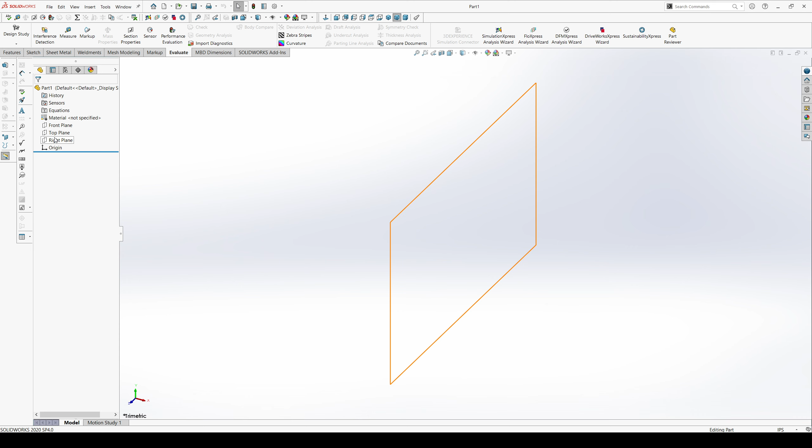So you get to Solidworks and you will select your front plane, go to an extruded boss base feature, and now you're in sketch mode. You need your planes turned on so that you can see your axis.

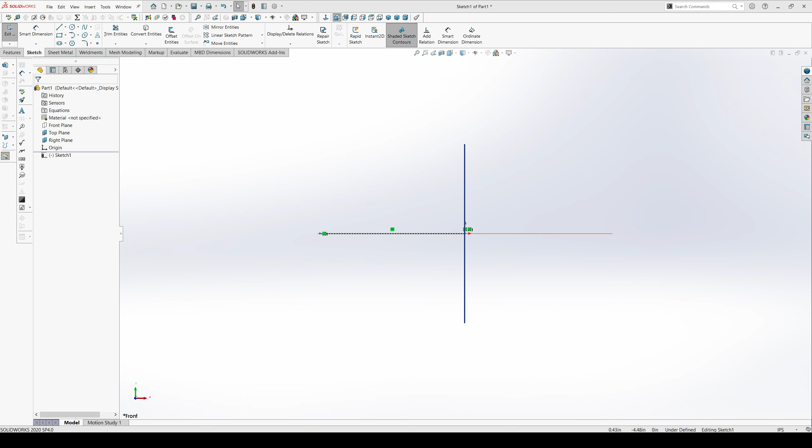And then let's start sketching. So we've got ourselves a line going from this axis here over, and then up and over, up, over, up, there's a little bit of a thing there, there's a little bit of a deal there, and then like that. That's sort of how it is.

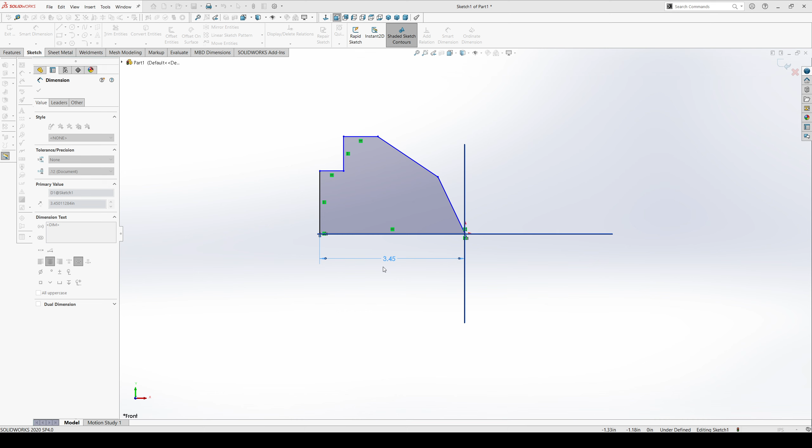And then you start putting dimensions. So you go up to Smart Dimension, and you'll select that one. And this one should be 3.62. And then the height should be 2.

And then you've got the height of the step is half, so go from here to here. That's 0.5. Then the width of the whole landing here, so you go from the point to the point, and that should have been 1.53, so we are pretty close.

And then the width of the step is 0.75, so you go from that face to that face, and you tell it 0.75. That moves everything over.

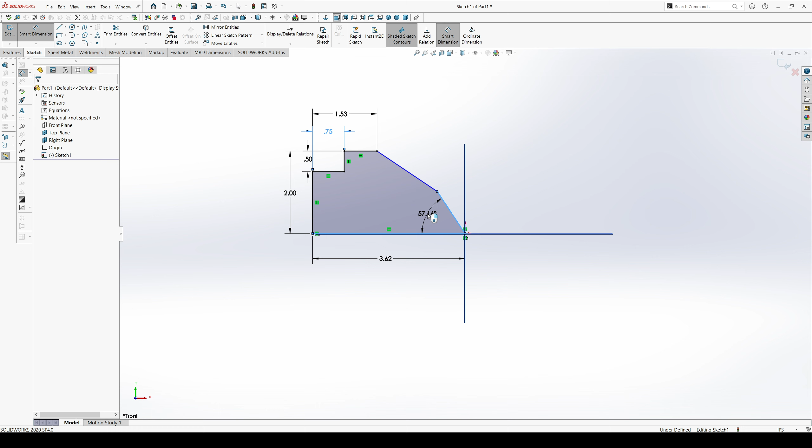And then you've got 2 angles that you gotta do. There's a 60 degree for here, 60 degrees, and there's this one. If you go on this side, you'll do the inside angle. If you go over here, you'll do the outside angle.

You just want this little angle over here, so you have to go below the line. If you imagine this has an imaginary line, you have to go below that. That's how you'll get this. That should be 30 degrees.

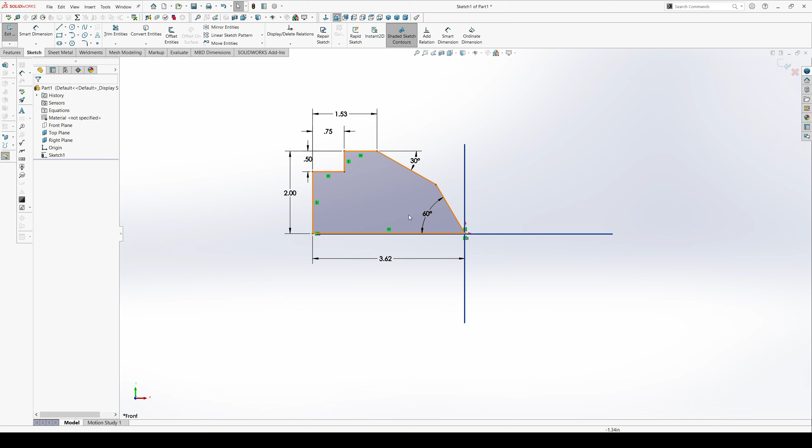We'll confirm that everything is right. Okay, and so that's how that's done. Your lines should all turn black. It may or may not fill in this color. That's kind of an option in the settings. But that's your first step.

Then you go over here in the top right. You'll have, if you hit the X, all this goes away. You want to hit the check, and you get into your extrusion mode.

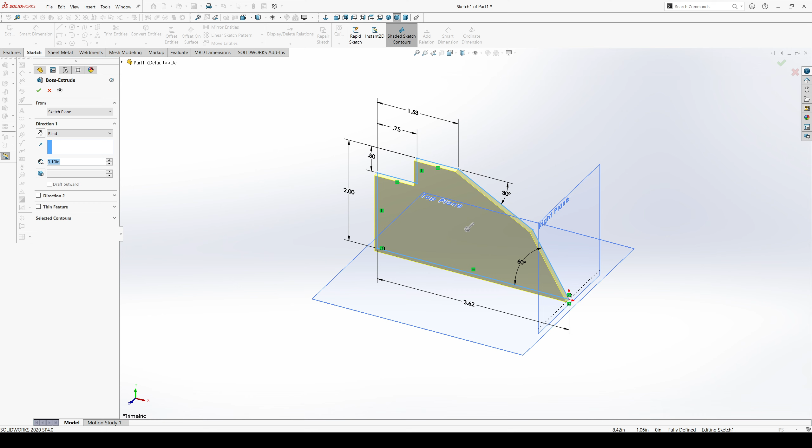And since our part is 1.5 inches wide, we'll do 1.5. But instead of doing blind, I'm going to do mid-plane, and that'll just center it along on this plane right here. And then you'll hit OK. And then now you've got a part.

And so at this point, I'd go ahead and save this. It's called PI02 for Ahmed. You can see I made it yesterday so that I know what to do.

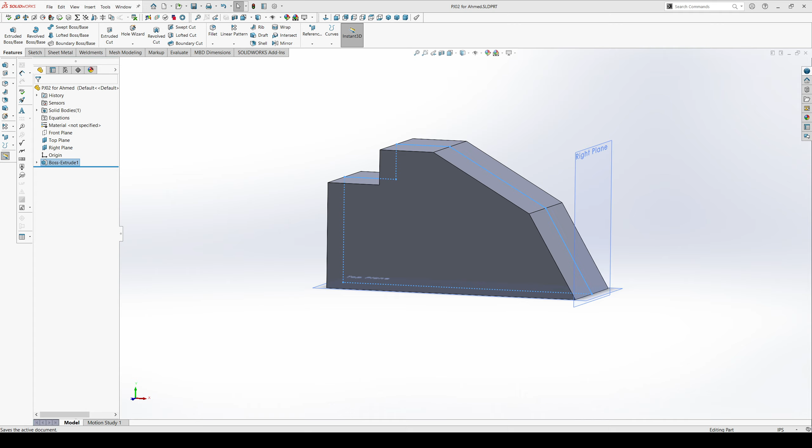Okay, so now you've got the general shape that you need, but here you need to have there's a giant cut in the part. So if you click on that button and you tell it a top-down view, so like that,

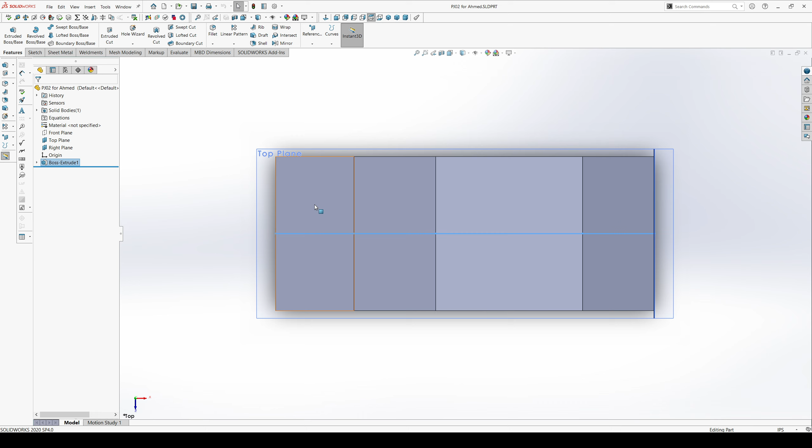And I like to have the dotted lines. I mean, you can leave it in that mode. You really can't tell what's going on. It'll all make sense in a moment.

So what you need to do is an extruded cut, and you're working off the topmost face, because you're trying to cut from this surface down. If you do it from here, the cut will start from here, but it'll miss all of this stuff up here. So you want to start from that face right there

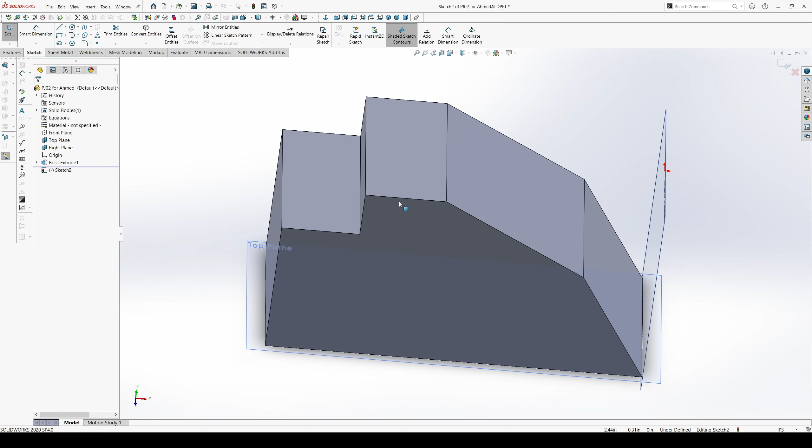and look back down on it. And then now we're in sketch mode. So there's some trickery here that I'm going to do.

We'll just do a line like that, and then like that, and then that closes that in.

Now you want dimensions, so you go from here to the outside. You want that to be 0.25. And then from here to the outside, also 0.25. And here to the outside is 0.25.

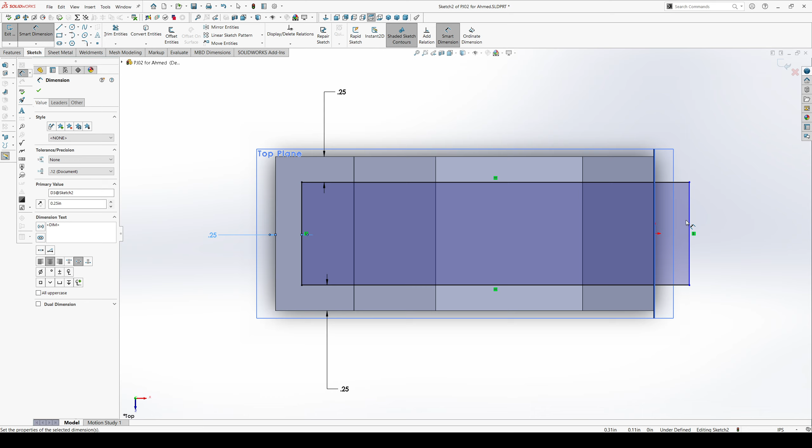And this side, I mean, you could make it up to the surface plane, but because you're doing a cut, it doesn't really matter how far out that one is.

Okay, so now you've got your sketch of how it's going to cut. We'll get out of this, hit the check right over here, and you'll see it's starting to take a cut. When it turns yellow like that, that's your cut.

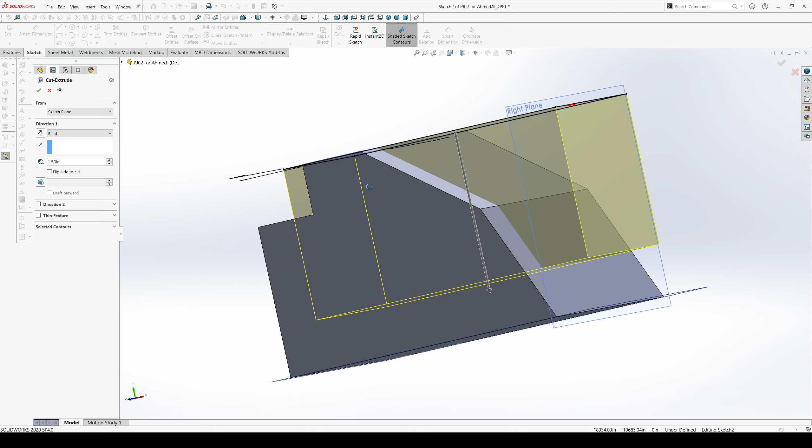So the height of all of this was 2 inches, but we need to leave a 1/4 inch at the bottom. So we'll make that 1.75, and that should leave us with 0.25 here at the bottom. And you'll just hit yes.

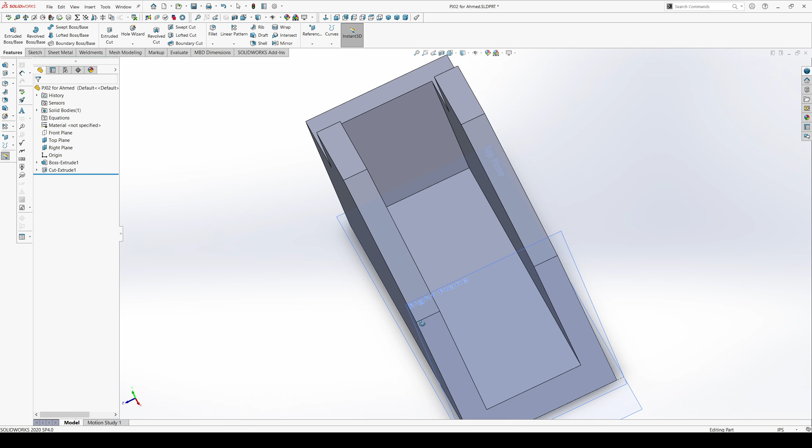And you've got the part with the cut. You can turn off your planes if you'd like at this point, you don't really need them. So there's your part.

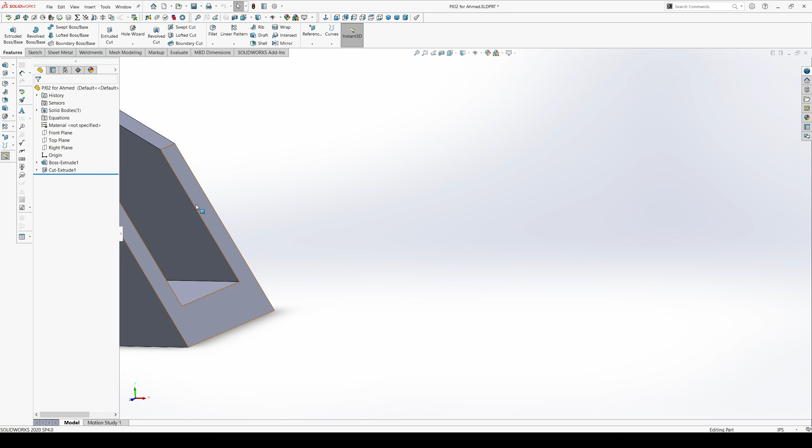If at any point you're moving around and zooming in and out and doing whatever, and you get off the part, instead of trying to zoom in and out to realign with it, you can hit Control and the Center button and drag it back into your view, and that way you can recenter on what you're trying to focus on.

So now we need to draw the circle. That's also an extruded cut. You could use the hole wizard, but this is usually set sizes. There's variations of holes here that you could do.

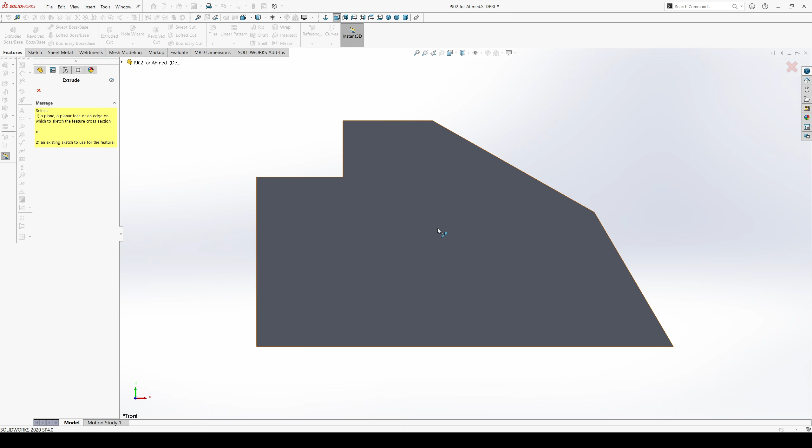So to avoid trying to get you the most perfect hole that you can do, it's easier to just do an extruded cut. Then you select the face that you want to work on, which is that first face here. Now you're back in sketch mode.

And we want the circle. We'll just drop that anywhere, doesn't matter. See how it's turned blue? That's because it's enclosed. So your dimensions now, this should be 0.75.

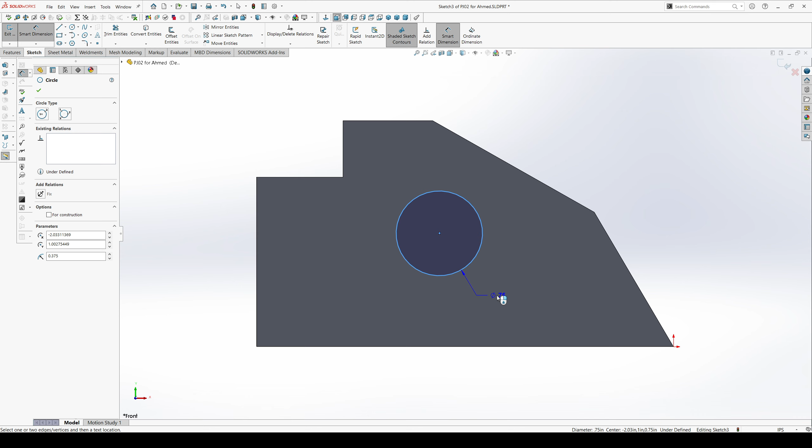And see, it doesn't really matter if you do the arrows like that, or if you wanted to show like there's a leader like that. You could show the leader like that.

Then the center is 1 inch down. It's right in 1 inch.

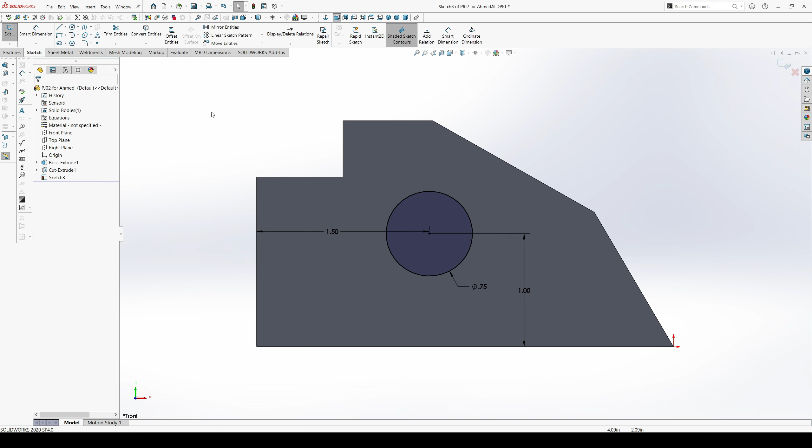And then this is 1.5 over to that. Okay, and then we're good on the dimensions. And then you hit the check, and it turns yellow, so that's your cut.

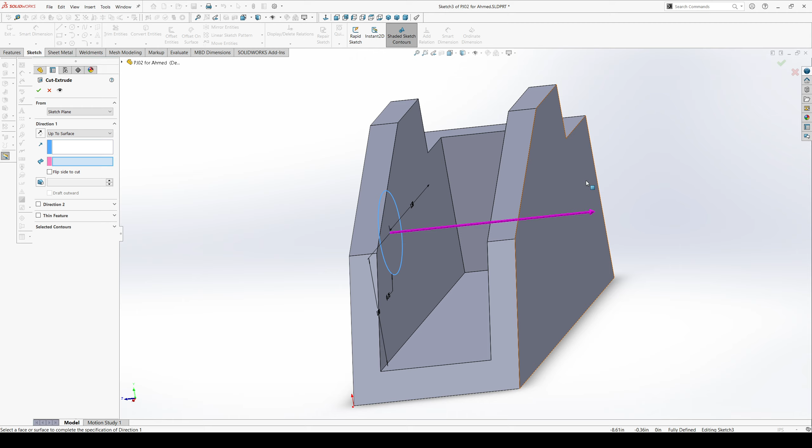And what I like to do is, let's see if up to next works. No, up to next goes to the next surface. You don't want that. So you just do up to surface, and you'd select the face on the other side. And that way you get only the cut happens only in your part.

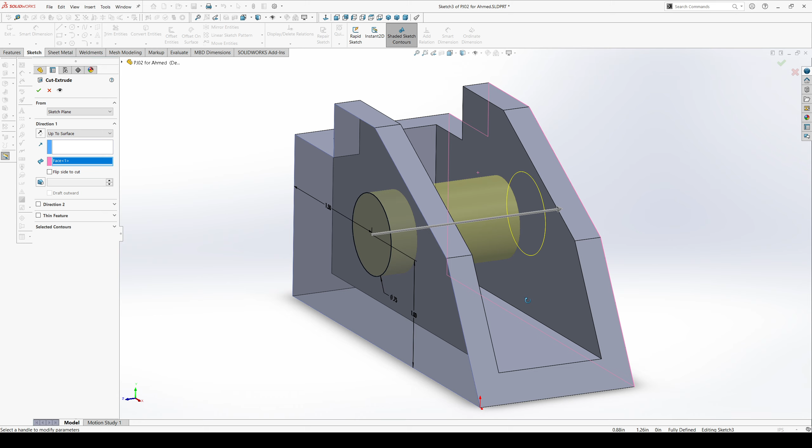So say you had something way over here on the right, you don't want it to just blindly start removing material from your other section. So you do from a face to a face, and it'll guarantee that your cut is only on the part that you want. And then you hit go, check mark, and there's your circle.

And that's all there is for making the part. I can show you how to bring up and create a drawing from this so you can show dimensional information.